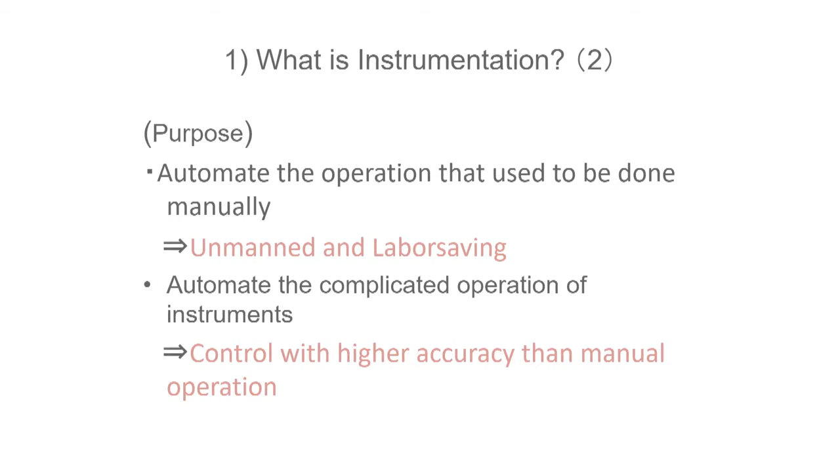Now, we have 6 service reservoirs and 2 pumping stations that we centrally control with instrumentation system. Likewise, we also monitor our distribution blocks. Our instrumentation system can largely be classified into 3, namely central monitoring of distribution reservoirs and pumping stations, monitoring the distribution reservoirs and pumping stations with monitoring cameras, and meter reading system for the distribution blocks. Developing these systems has greatly facilitated our work for safe and stable water supply.

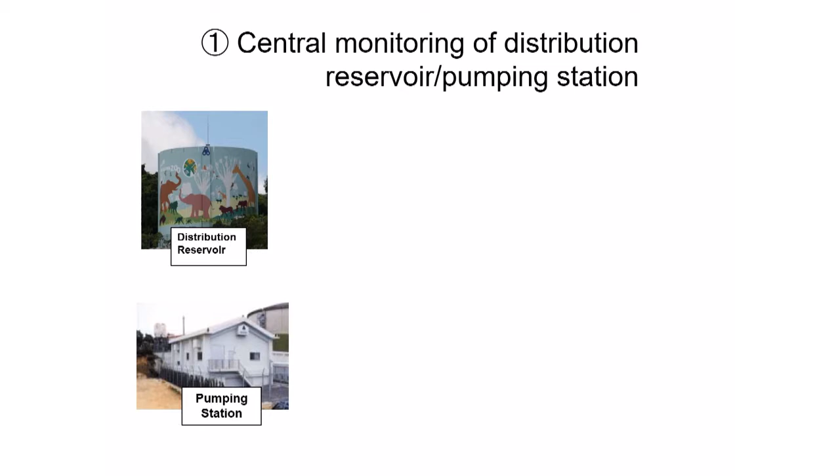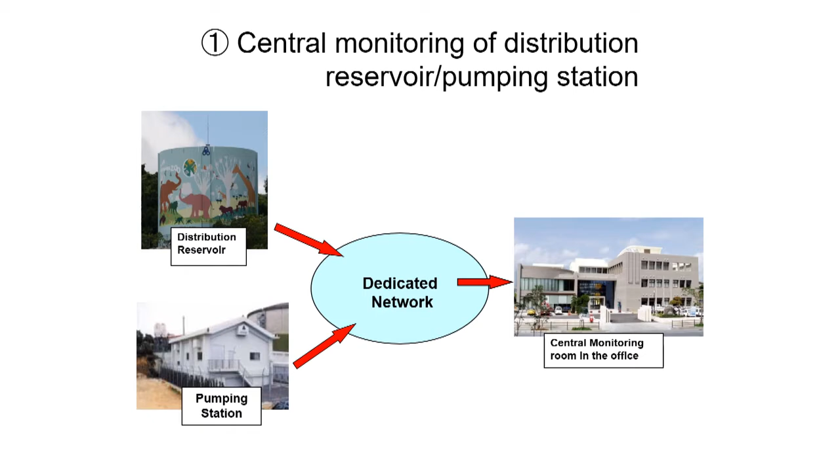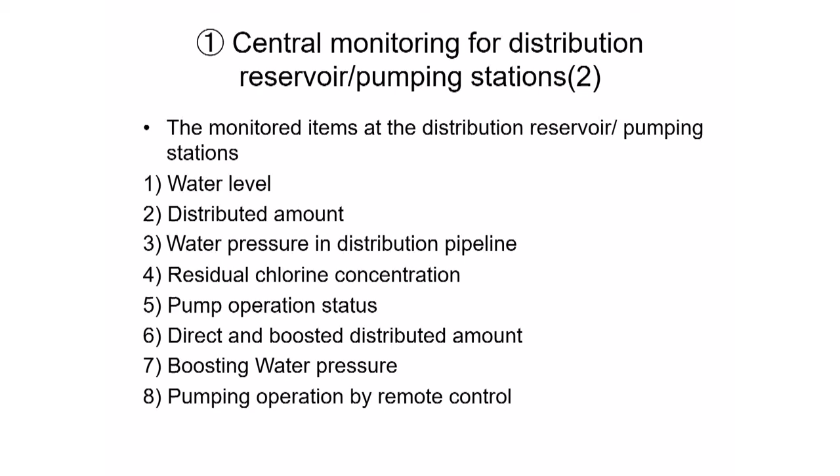Now, let me talk about central monitoring of distribution reservoirs and pumping stations. These 6 distribution reservoirs and 2 pumping stations are, with a dedicated network, connected with the central monitoring room in the office for constant monitoring and measuring. What the instrumentation system automatically monitors at distribution reservoirs are mainly water level, distributed amount, water pressure in distribution pipeline, and residual chlorine concentration. Meanwhile, at pumping stations, the system enables remote monitoring of pump operation status, direct and boosted distributed amount, and boosted water pressure. It can also remotely operate pumps.

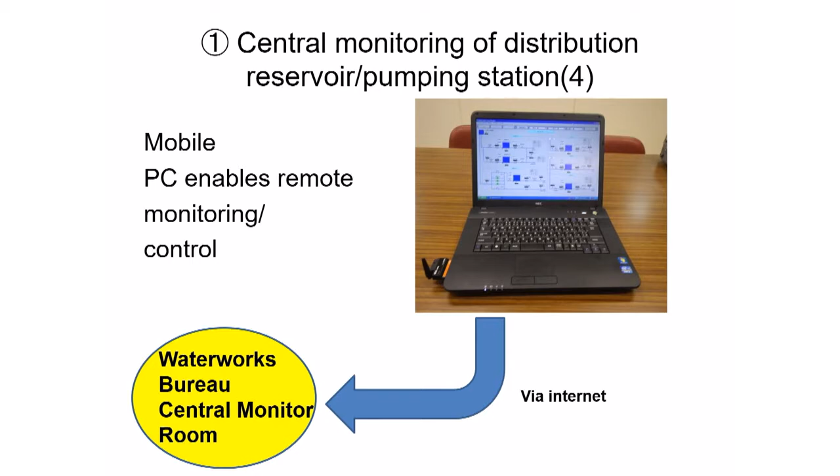We also introduced a mobile monitoring system in 2008, which enables us to check the same monitoring items on a mobile PC browser, even being away from the central monitoring room in the evenings or on holidays. Such easy access to information enabled staff members in charge to monitor from home and helped ease their mind and the burden.

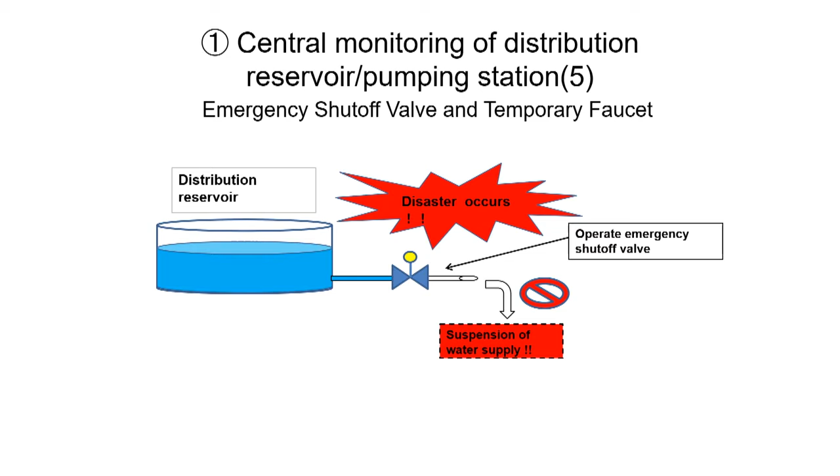In addition, as a measure to increase our water distribution facilities' resiliency against disaster, we have introduced emergency shut-off valves and temporary faucets. Disasters such as earthquakes can cause large-scale leakage and excessive flow. When it is detected by the monitoring system, the emergency shut-off valve operates and suspends water distribution. Distribution reservoirs are designated as places of refuge at times of disaster. With temporary faucets, we can distribute water stored in the reservoir to citizens.

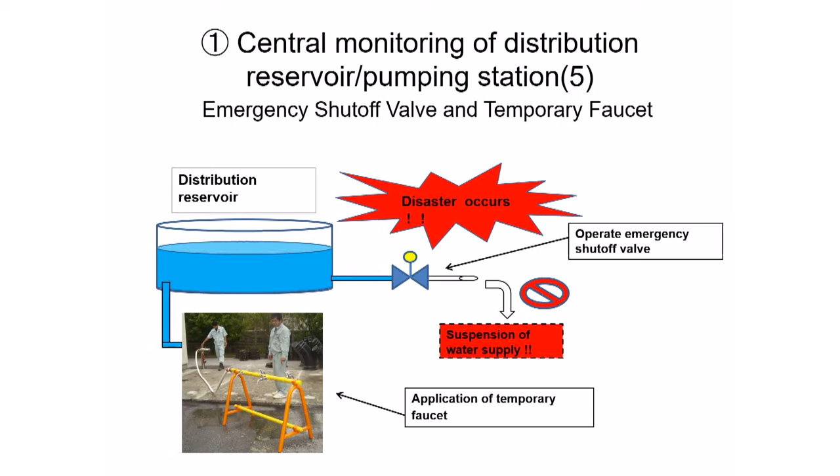As you can see, while distribution reservoirs' basic function is to temporarily store purified water for stable supply, they can serve as a gigantic water storage to put limited water resources into effective use. Moreover, even when a power outage causes communication equipment installed at distribution reservoirs to go down, we can bring a mobile telemeter to take over data communication until power is restored. Currently, we are considering introducing mobile telemeters for our distribution block metering system at its renewal as well.

At normal times, data from distribution reservoirs and pumping stations is taken at machine rooms and is transmitted through a dedicated network to the central monitoring room to be monitored. Meanwhile, at times of emergency, monitoring can still be done with radio equipment installed at each facility. This method is available for all 6 distribution reservoirs and 2 pumping stations.

Next, let me explain the use of surveillance cameras for distribution reservoirs and pumping stations. Surveillance cameras and infrared sensors are installed at these facilities, operating 24/7 surveillance. The sensor detects intruders like people, animals, etc., and the camera records the scene. Video footage captured by these cameras is stored for later retrieval for about 2 weeks.

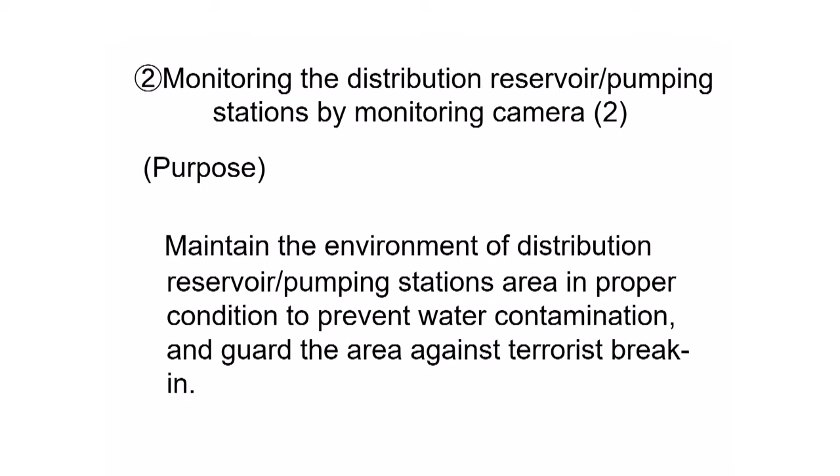Now, let me talk about our distribution block metering system. Our distribution blocks are remotely monitored with the system, which transmits real-time data via mobile network to monitor the inflow to the block, as well as distributed amount. The system was introduced for early detection and repair of leakage, water pressure monitoring in the pipe network, and for using it to aid remote control of each pressure-reducing valve in the future. Once those goals are met, we will be able to ensure further stability and affordability of our service.

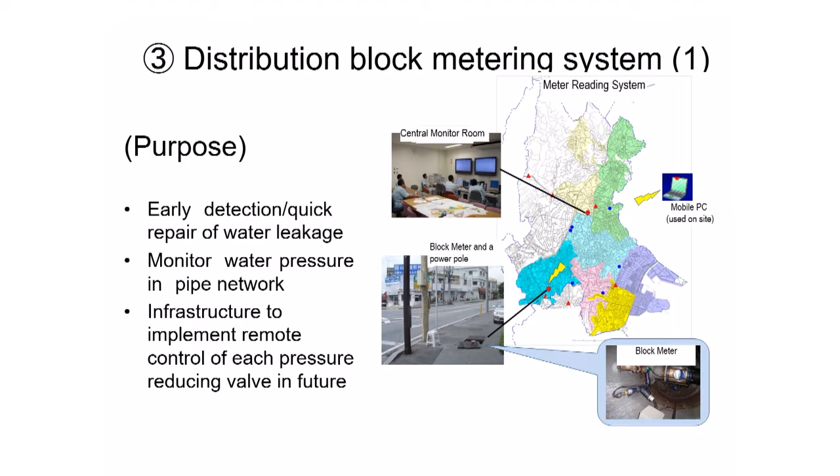The metering system receives pressure and flow data from measuring points every 5 seconds and automatically creates daily reports with hourly data. Staff members in charge check the report every morning to adjust pressure in distribution blocks and to check minimum night flow to determine if leak detection work is necessary.

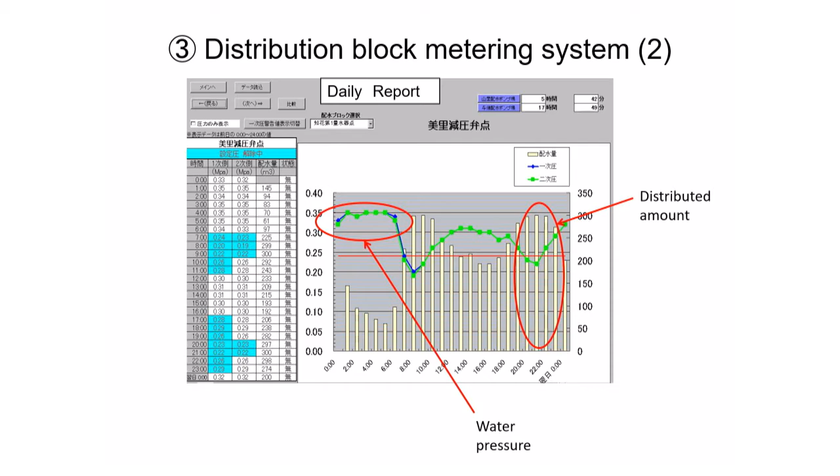Regarding future steps, what we have in mind include establishment of microblocks, introducing ultrasonic flow meters, controlling pressure-reducing valves with the distribution block metering system, wider use of telemeter poles and temporary faucets, integrating the distribution block metering system with GIS, and effective use of daily and monthly report data.

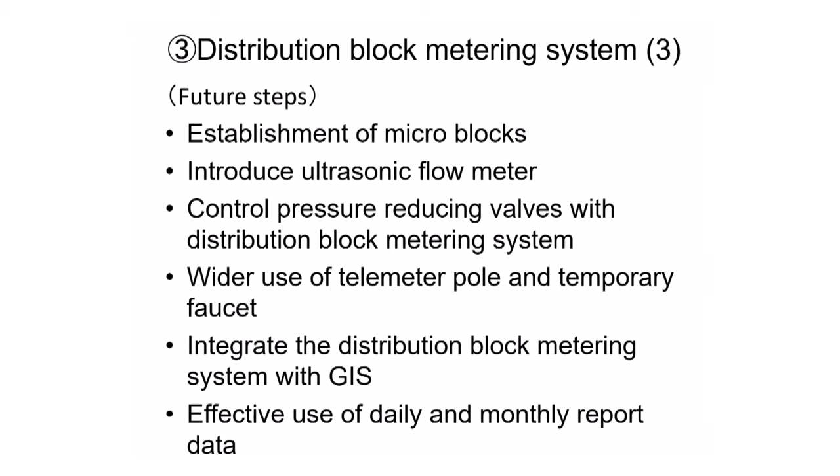Let me summarize this session in 3 points. First, distribution reservoirs and pump stations are constantly measured and monitored by the instrumentation system. When abnormality occurs, the system reports immediately. We will continue to incorporate new technology to improve resiliency against disasters. Second, the distribution reservoirs and pumping stations are monitored for safety with surveillance cameras. Lastly, quick response was made possible by checking the minimum night flow and the water pressure of reducer valves every morning for large, medium, and small distribution blocks. This concludes the introduction of water supply facility management with instrumentation system.

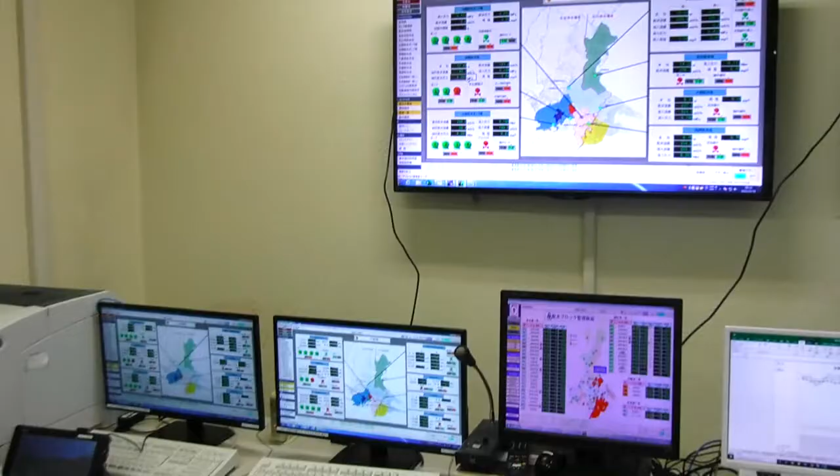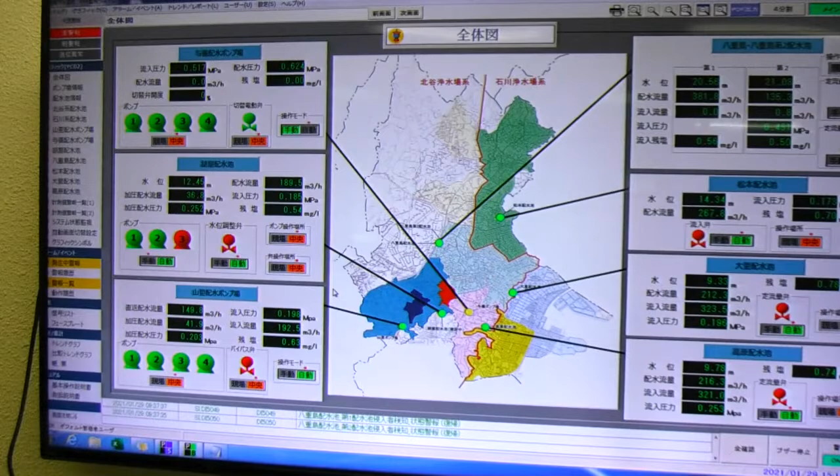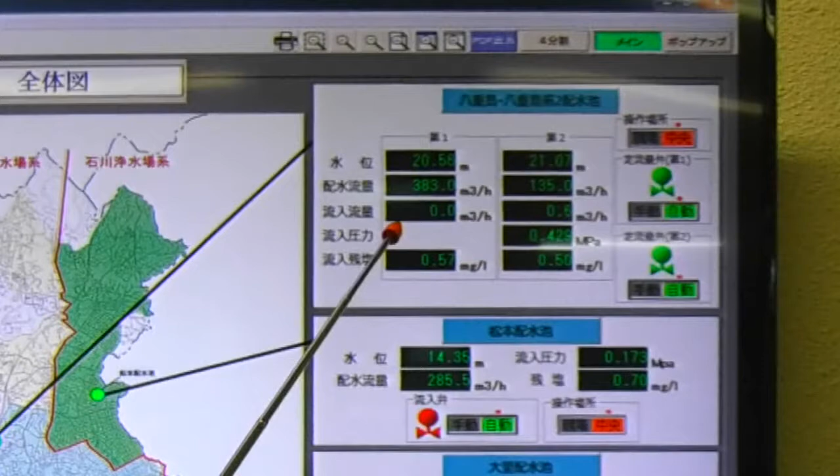In the lecture part of this session, I showed you the general view, which is displayed here. Let's take a look at monitoring items one by one. In Okinawa City, there are 6 service reservoirs and 2 pumping stations. All data taken from these facilities are displayed on this monitor. As you can see, you can check water level, inflow rate to the reservoir, distribution rate from the reservoir, and residual chlorine concentration.

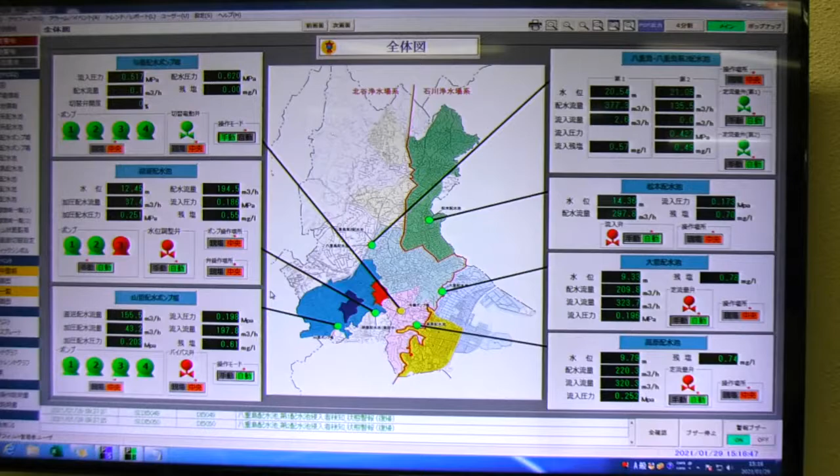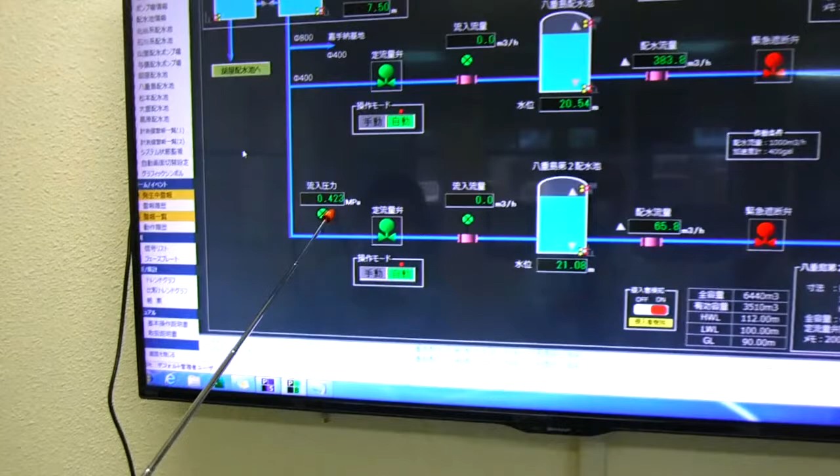Let's switch to another view. Let's take Yaeshima Service Reservoir, for example. There are 2 reservoirs there, and I will explain with the second one. Here are the monitoring items. Inflow pressure is currently 0.428 megapascals, and the constant flow valve is closed now.

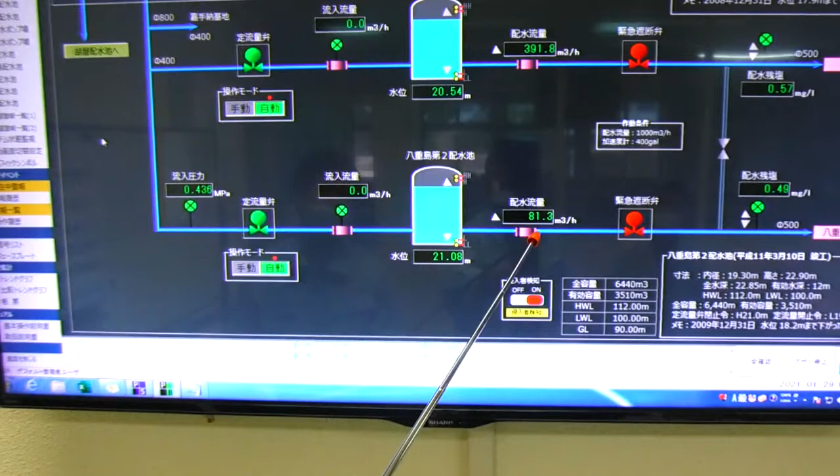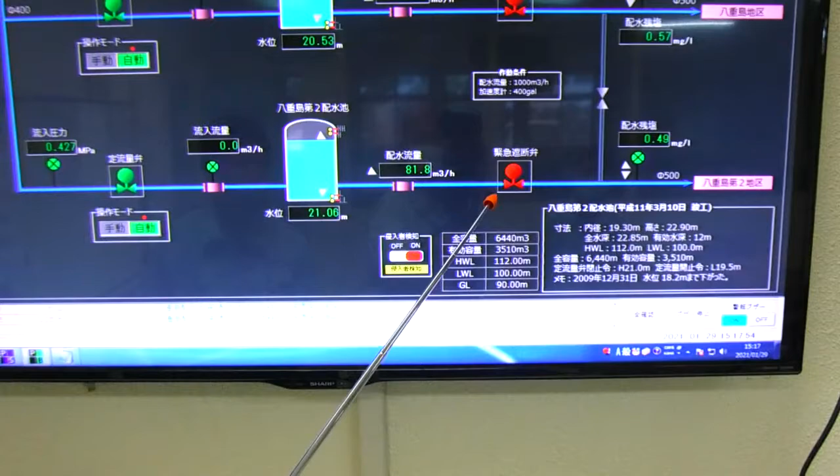Inflow rate is 0. Water level is about 21.1 meters. And current distribution flow rate is about 80 cubic meters per hour. We can also see the operating status of emergency shut-off valve. As it is for emergency, it isn't in operation now. Lastly, here's the residual chlorine concentration. It's about 0.5 milligrams per liter now.

This screen tells us current values of all monitoring items at this facility, and we can also check past data by switching to another view. This line graph shows the past trend of monitoring items. Current data is shown at the right end, and data from 24 hours before that is at the left end.

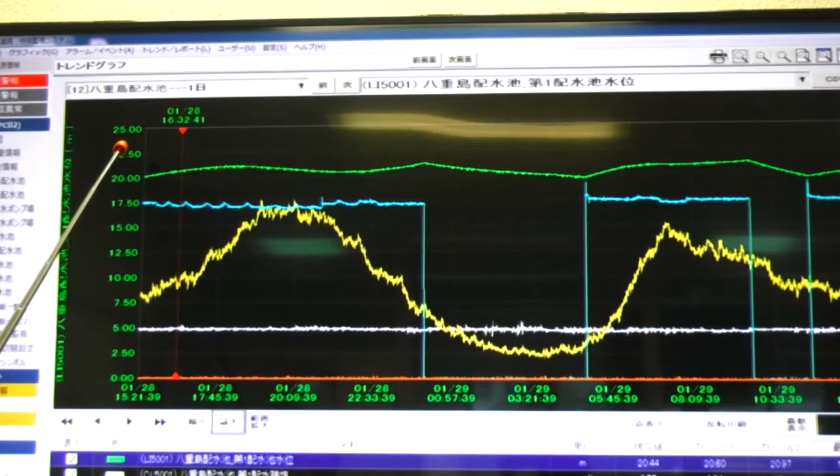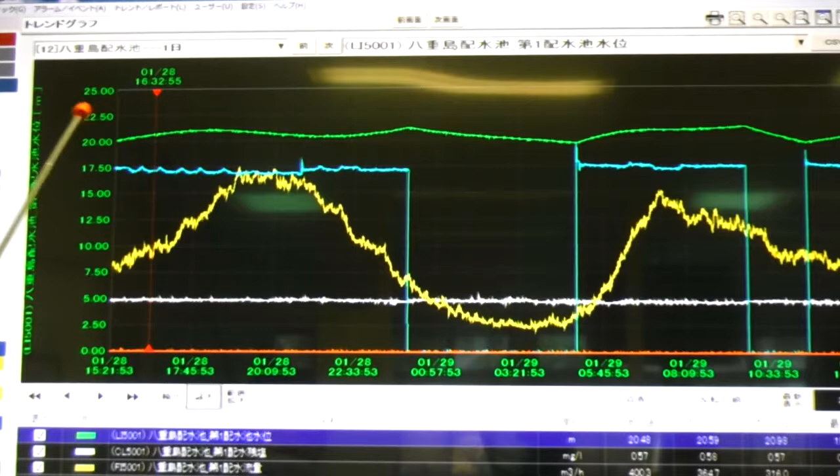The green line shows water level. We constantly monitor water level, and it is automatically controlled to be at the constant level. It is because if water level becomes too low, water pressure is also reduced, and it may cause low water flow issue for customers located at places of high elevation.

The white line shows residual chlorine value. Under the Water Supply Act, it has to be kept at higher than 0.1 milligrams per liter. So we make sure the measured value always exceeds the required value. Now it is about 0.6 milligrams per liter, which is good.

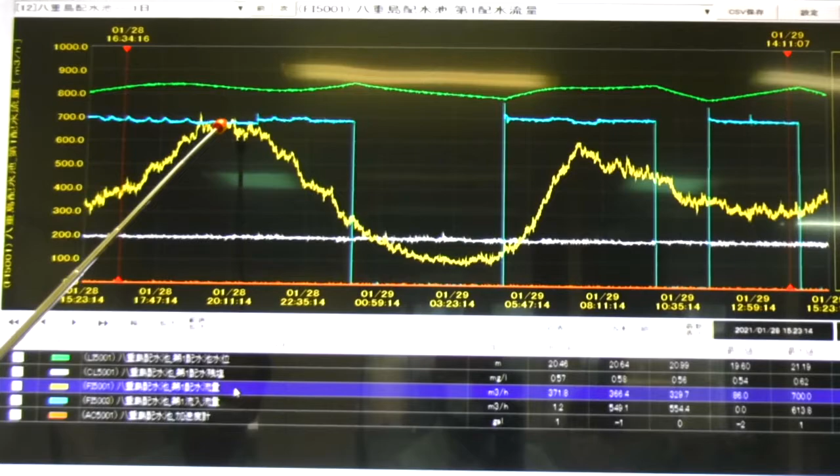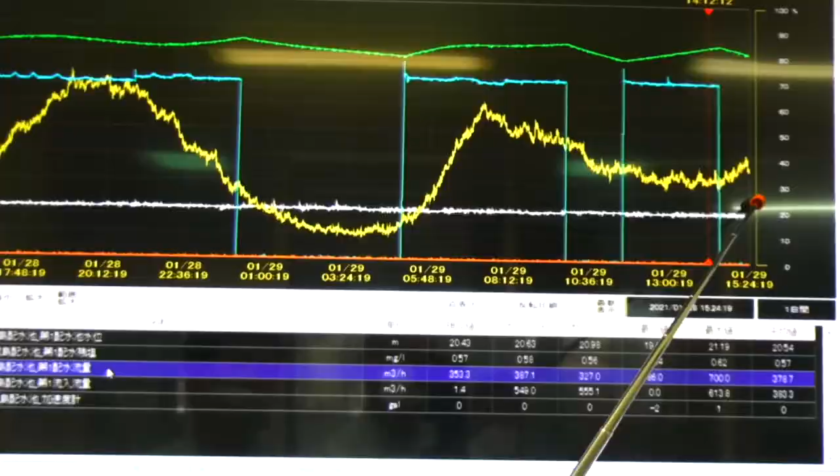The yellow line shows distribution flow rate. It shows the water consumption trend in a day. It is about 300 to 400 cubic meters at 3:20 p.m. As we can see, consumption peaks from 5 to 8 p.m. After that, it gradually decreases to a very low value past midnight. Then, in the following morning, it starts to increase once again, and the cycle goes on.

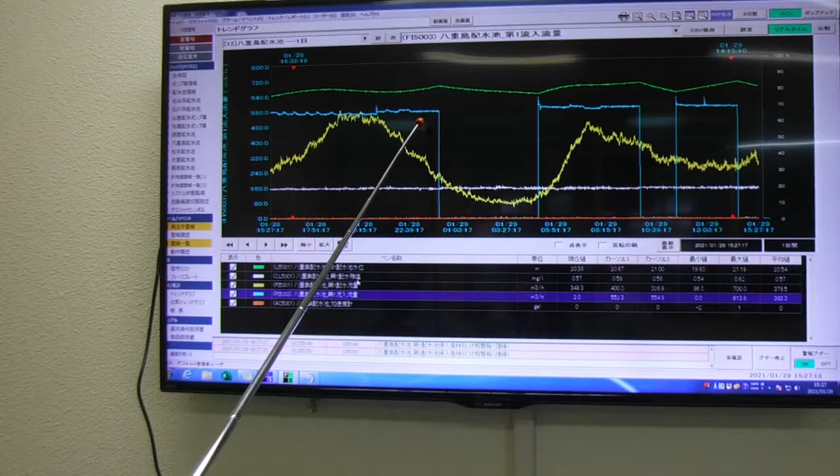The blue line shows flow rate of incoming water. We can see that the inflow is constant, and once the reservoir reaches its full capacity, inflow valve is closed to stop the inflow. Then, once water level goes down to a particular level, the inflow valve opens and resumes inflow till the water level reaches the predetermined value.

The red line shows data from an accelerometer. It is installed to detect vibration in case of an earthquake. Since there hasn't been any earthquake recently, the value is 0. When an excessive increase in distribution flow rate or intense vibration is detected, emergency shut-off valve operates to stop water distribution. That's all for the central monitoring system.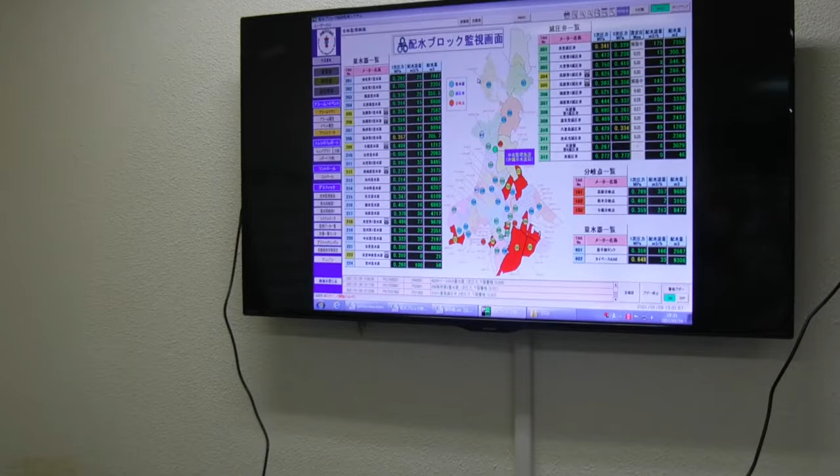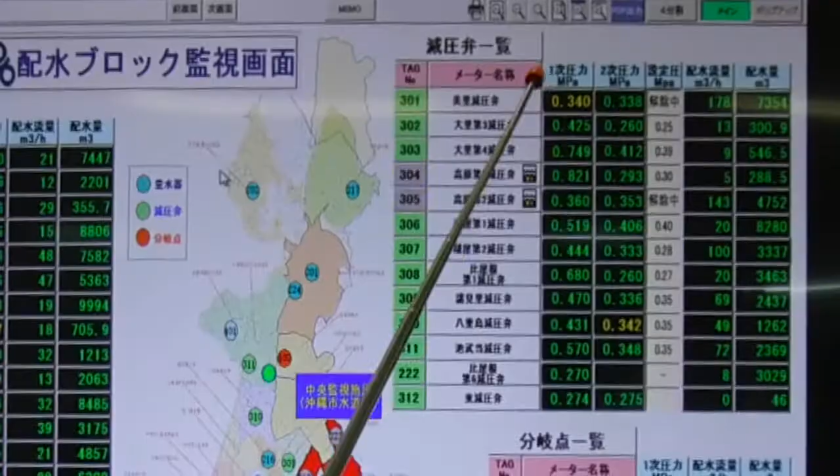Next, let me explain the water distribution block metering system. This is the monitoring screen for the water distribution block metering system. There are 41 distribution blocks in the city, and all the monitoring items for each block can be checked on this screen. Monitoring items for block meters include water pressure, flow rate, and amount of inflow. Meanwhile, monitoring items for pressure-reducing valves include primary water pressure, which is pressure before it is reduced, secondary water pressure, which is pressure after it is reduced, flow rate, and amount of inflow.

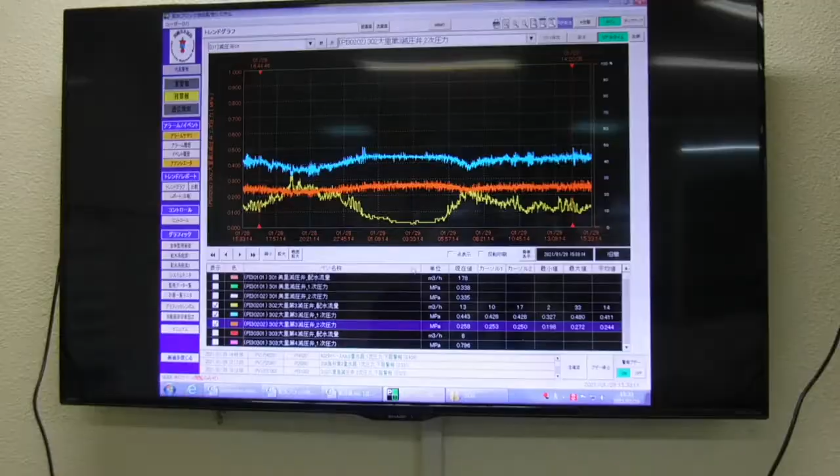Let me show you a line graph for one of the pressure-reducing valves, for example. The blue line shows the primary water pressure, the orange line for the secondary water pressure, and the yellow line for the amount of inflow.